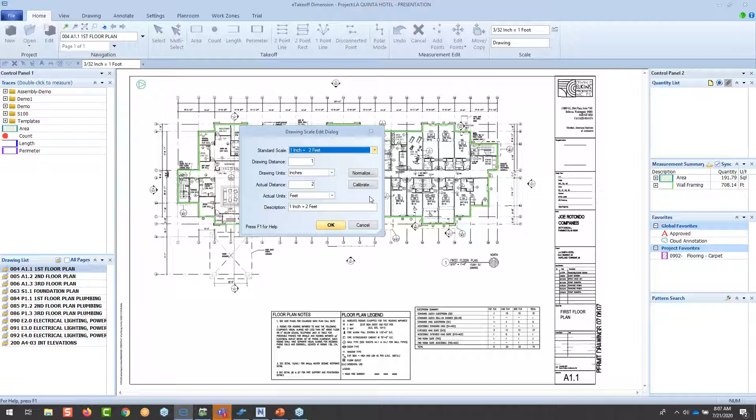So we look over here, we've got, of course, a scale. Got to know the scale. We give you the capability to do imperial, or we give you the capability to do metric. Now, here's the thing, we always want to be able to calibrate the scale. We want to make sure that the scale the architect or whoever gave us the plans is accurate, so distance between two known points, and we can calibrate that scale for you.

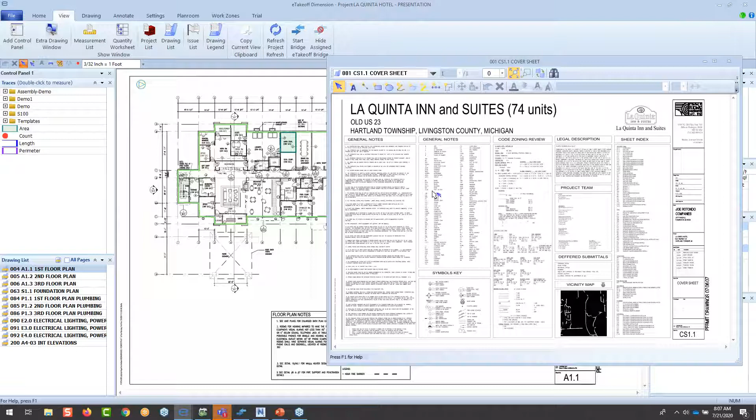As we move over here, we're going to look at view because it's important to be able to see lots of information. So what we want to do is give you the capability to see as many windows or as many pages at one time as you want. Lots of ways to navigate the system, but as you can see, here's my main screen back here. Now we can zoom in. Here's where those additional windows come into play. I can drag and drop this on my other monitor, and we're good to go.

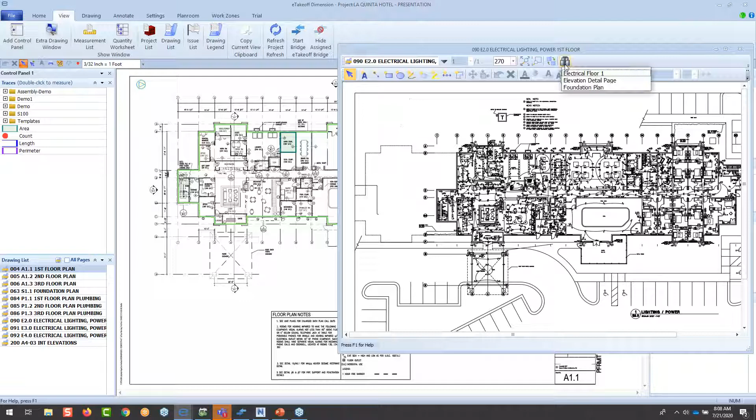We can make any notations, red lines, whatever you're looking at, and we can quickly get from one page to the next. So drop down menu here, or we can just very quickly go to those defined particular pages we set up.

Let's take it to the next step and let's get rid of that extra page. Now we're zooming in on this area right here. One of the things that this solution does that no other solution will is give you the capability to have multiple detailed scales on one page. In this case, in this border right here, it's a quarter inch equals 1 foot. Down here, 6 inches equals 1 foot. But the overall scale right here is a half inch equals a foot. You can have as many scales on one page as you want.

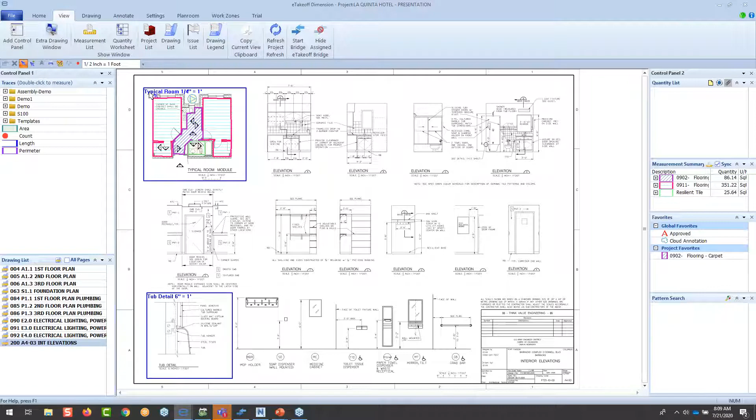Some other solutions make you copy a page, name it by another scale. Pretty soon you've got like 5 pages that represent the same page because of a lack of capability of that solution. So as we drill in here, we're going to zoom in this particular area right here, and we're going to do an overlay.

We want to be able to compare that revision to what we've already taken off. And as you can see, if we drill in even further, red is old, blue is new. We're going to take that countertop out a little bit. We're going to turn the stove top and make it work for us.

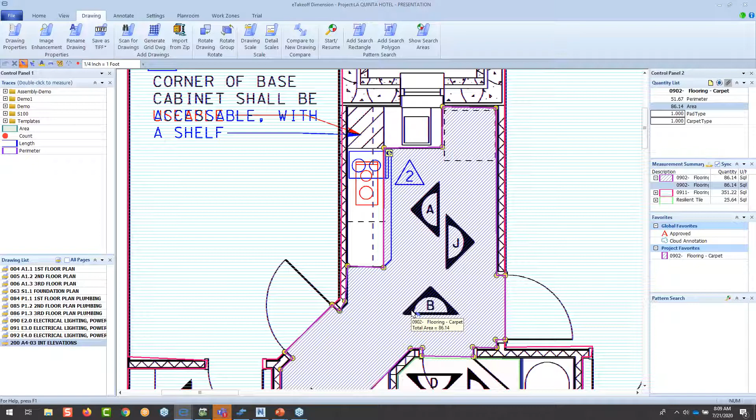Now, one thing about this takeoff here is I've already sent it to the estimate, generated an estimate from it. Well, I'm going to make some changes here. I'm going to edit this guy real quickly based upon the changes that we've seen here.

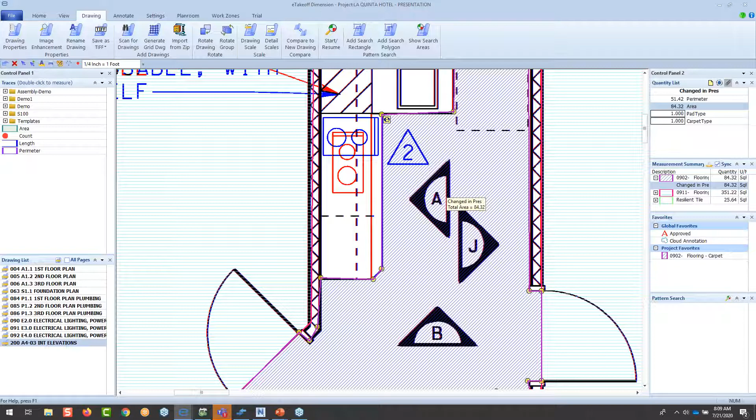And then I'll change the naming of this to 'changed in presentation,' I'll just say pres for short. I can only do 30 words per minute, that's the best I ever did in typing, so I don't want to bore you with a lot of typing as we go through the process.

So let's navigate out and start doing some takeoff. As you can see, there are a lot of ways to navigate with the system, hyperlinks and all sorts of fun things we can do here. So let's do a quick takeoff.

Let's do an area, and with generic takeoff right out of the system, we have the capability to do perimeter, length, and also area. So I have a point, length, and perimeter area count. If you're a unit price contractor, that may be all you need — just that area, then put a dollar per square foot. But we do want to give you some functionality above that.

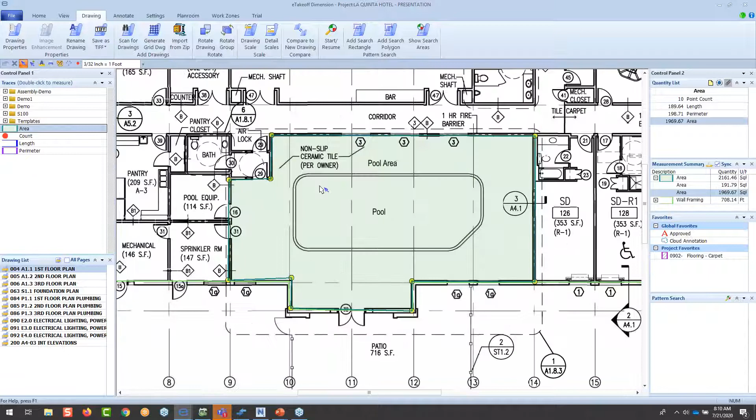So with that being said, if I drill in here and want to back this guy out — by the way, in the next iteration of this solution, we're going to have the capability to just hit this line and it will take off that entire line for us. So just so you know, that is coming in the very near future.

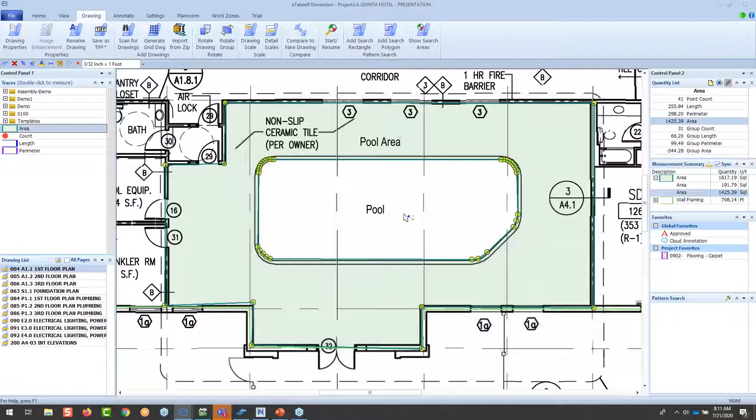So in this case, in that pool area, it might have been stamped concrete, paver stones, whatever it is for your company. But we back that pool out because we know it's going to be a different material. In this case, we want to define what that's going to be really quickly, and let's call it concrete. Boom, done — we've just taken off that area as expected, filled in completely, specific to that line.

Now you'll notice a couple things here. First of all, you've got an E. This E is a protection, a safety layer for you to make sure you do not miss anything. Matter of fact, if I go into our summary right here, I'm going to see that E. Let's say you're in review mode and you want to make sure you don't miss anything — we'll be able to see that.

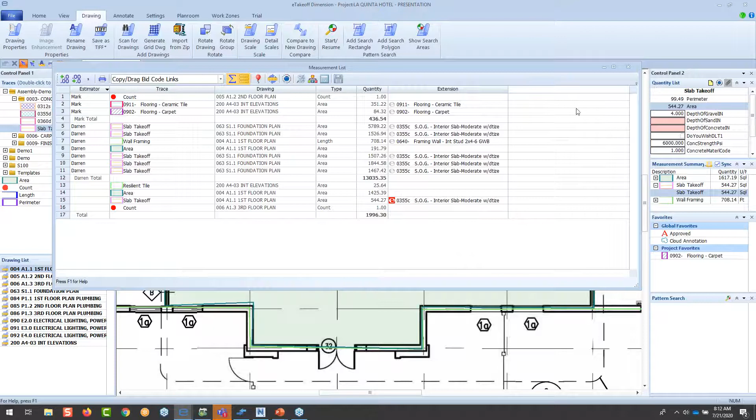By the way, I've got this sorted by the people that have been working on this particular plan, so you can see the estimators within here. A lot of flexibility we can do with the solution, but I just wanted to show you, even in review mode, we're going to give you an alert that we need to fill in more information.

So let's go ahead and do that, let's fill in some info. Now you look, and here are what we call variables. For those of you that have used our estimating or worked with our estimating, used to be Timberline — I come from back in the DOS days, believe it or not. Well, believe it, if you saw me, you would believe it, my face shows the age.

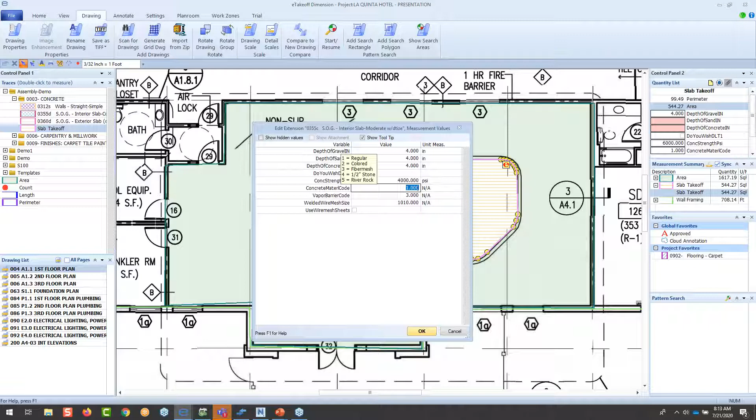But when we look at this, we've got depth of gravel, depth of sand, those variables defined by the concrete. So whatever your business does, we can define these variables specific to what that would be for you. In this case, I'm going to say 4 inches, 4 inches. What's the PSI of the concrete? We'll say 4,000 PSI. So again, whatever those questions may be for your company, we can achieve those.

I'll say okay to that, and we'll do one more to give you a little bit of a different look at what the takeoff would be. Let's do wall framing, and let's just quickly take off this wall. Same thing, same E as you'd expect, but different questions because it is a wall — it's an interior wall, so what's the stud spacing? What's the stud size? You have that capability there.

The number of corners, we'll put 3. And then if we did drywall, we could enter that information, that detail as well. So just wanted to give you a different example of what those variables are like.

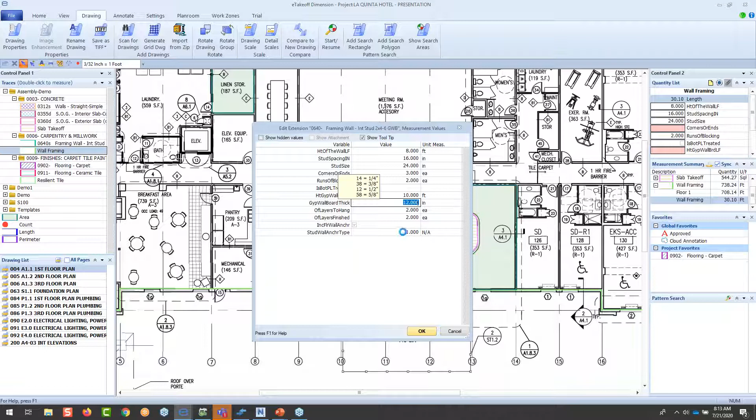Now, one thing to keep in mind is as we see this flow over into the estimating, every one of these answers will flow over. So I'm not just taking one item or one quantity, I'm taking them all. So let's look at a couple other things within the system.

Well, first of all, you may want to put some stamps out here. You want to have some automation, maybe some clouds that you want to have available to you that you use over and over again for every project that you do. Well, we've got that covered with global favorites, so we don't have to create them over and over again.

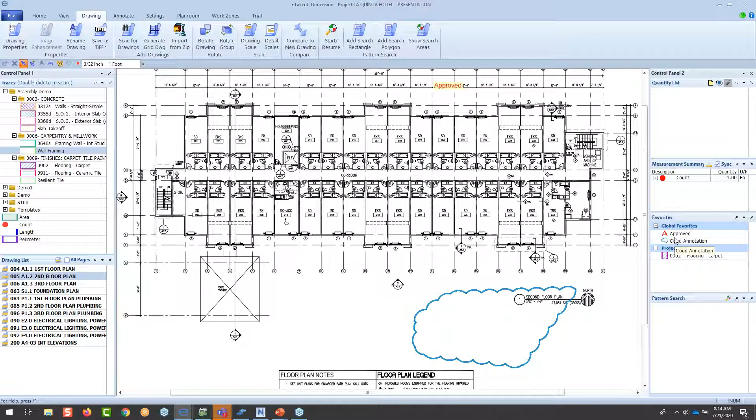They're there for us. When it comes to takeoff, maybe we've done this whole takeoff on another floor. Well, now we want to make it very easy for you to set it up as a project favorite specific to this project. I've taken off this whole floor, but in this case right here, I may need to make a change to the individual takeoffs as well, which we give you the capability to do. So for this, I'm going to name this floor in Pres or PRS, short, getting even shorter as we go.

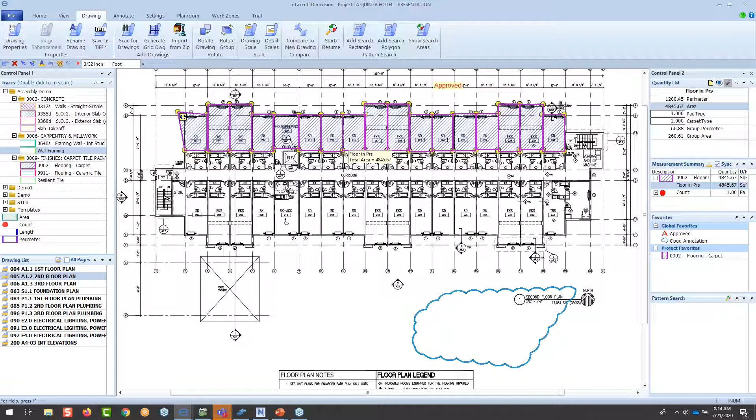Now, let's go over here and navigate to plumbing. Let's say I'm a plumber and I'm looking at the fire suppression we're going to be working on here, and we've got these sprinkler heads. Well, I don't want to go through and click, click, click. In our advanced solution, you can go through and check these particular things off manually. Or what we can do in our Premier solution is just say, hey, go find these for me. Let's have the solution do the heavy lifting for us. Makes it very easy to do.

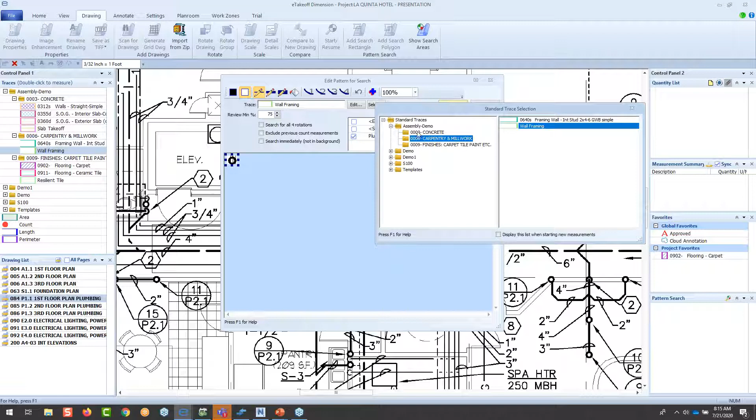So with that being said, I'll go ahead and say this is a sprinkler head, and based upon the light to dark, let's tighten this up a little bit right there, just so we get all of the ones that we want to find. Now it's going to go out based upon 75% of the ratio from dark to light. Say okay, so it's going to go search for me, and basically in seconds, we've got all of those particular heads that we're looking for.

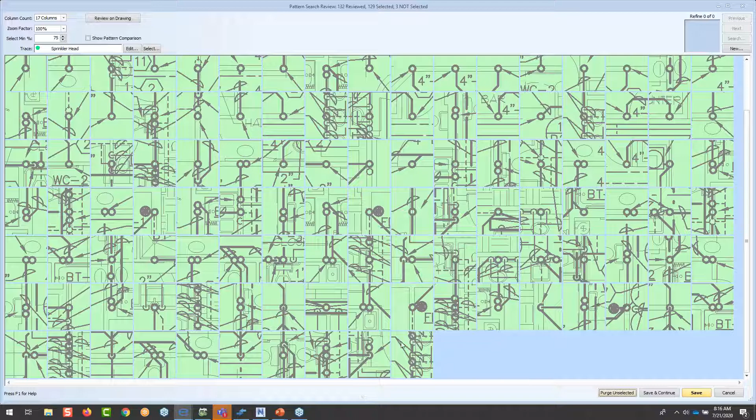So in this case right here, there may be some that we may think, oh, this isn't one, so on and so forth. Now we can purge those, Purge Unselected if we want to, just by clicking that. Or we can go through the process of looking at, you may need further review. So I'm going to go to the drawing, and now I can see those ones that need some inspection there. They're kind of darkened right there, and I'll say those are good. We may need to change that guy because he looks right to me. So giving you the capability to review it right on the page makes it very quick, makes it very easy for you to do.

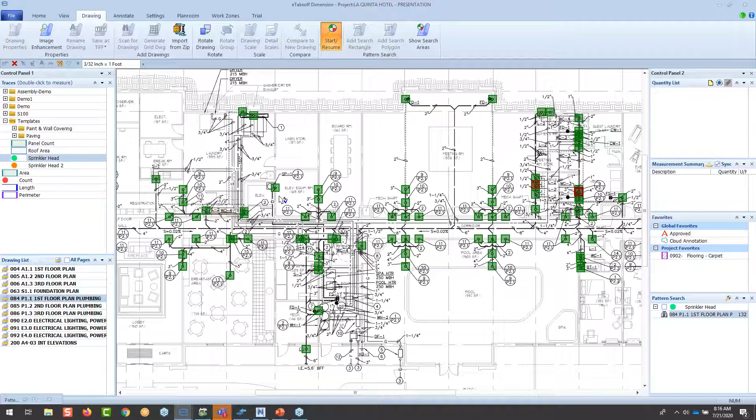So with that being said, I think we're ready to go ahead and count them. Now, with this, I've got 2 unmarked ones. So think about when you're looking at doing counting, you sometimes will come up with things that are like items. You still need to count them, but they aren't the ones you were looking for. Well, what we can do is we can save and continue, and now we've left these 2 behind, and we'll say, oh, those are the sprinkler head 2, save.

So now we've done that. We've gone through and we've counted all of those particular items right there, but we have more pages where those exist. Let's very quickly go ahead, search.

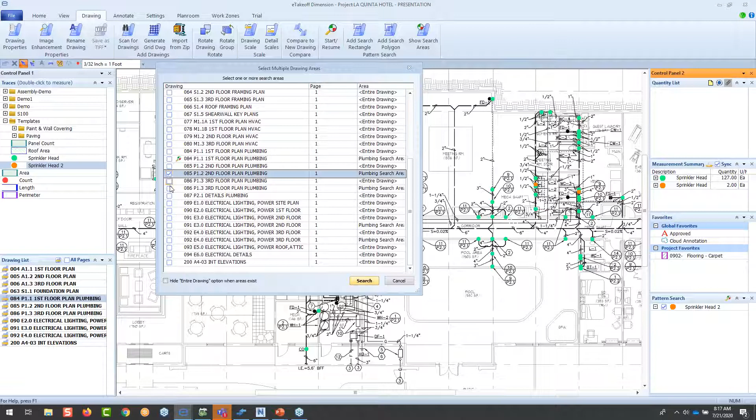And now when you're looking at this, this is based upon the size of your computer and the number of cores that you have. If you have 10 cores or 8 cores, that means you're going to be able to count 7 pages at one time, and we leave an extra core for you to do takeoff while the machine is doing the heavy lifting and doing the counting for you. So in this case right here, I select those, it goes out and searches, and it'll find all of those particular heads for me. In this case, I'm going to call these sprinkler head in pres.

So now what we want to do is we've gone through the process of doing the takeoff. Well, we want to automate the process of generating an estimate. So with that being said, now we've got all of these items that we've taken off. You can see floor 1, sprinkler head 2, sprinkler head 1. I called this sprinkler head in pres, so on and so forth.

Now, here's the thing, and this is in line with what I talked about. We have multiple people going in and doing takeoff for this particular presentation. Well, for this presentation, but that's what the product will do for you, right? So we have multiple individuals. We could just take off everything that I've done and leave what Bob's done behind if we wanted to. It's up to us. But in this case right here, we'll send everything over to the estimate.

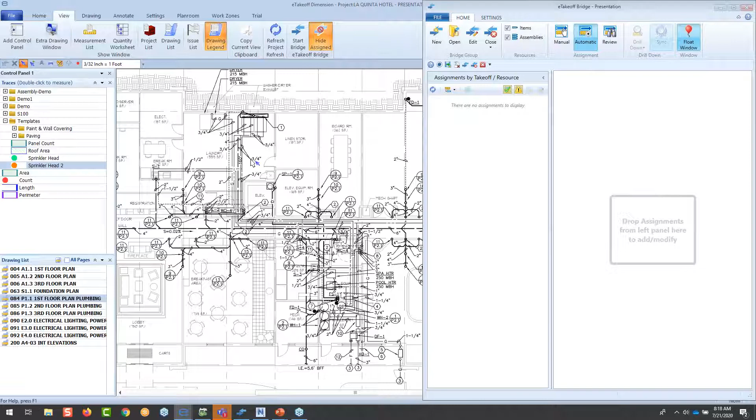By the way, anything that's been taken off, if you go over here to the product, it hides it for you, so you know that it's been taken off. If there's anything remaining there, then you know that hasn't been sent to the estimate.

Now, as we get into review mode, remember the change I made to this guy right here? The system has alerted me to the fact that that change has been made, so I can update the estimate. It went from this to this. So with the click of a button, now I can update the estimate.

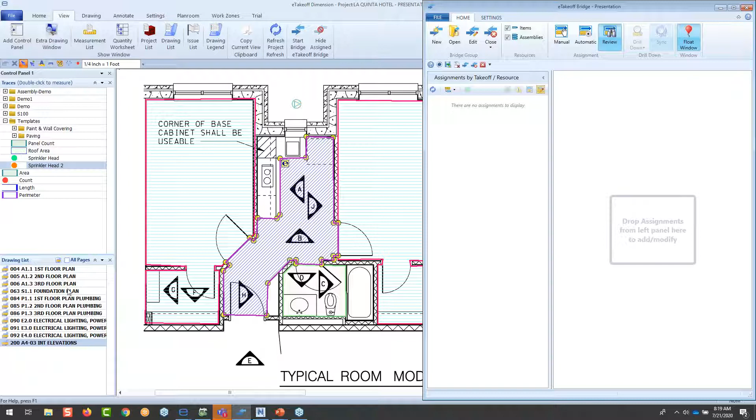One more thing, and then we'll jump into the estimate. This, I'm sure, happens to quite a few of you out there, where maybe a change of a specification happens. So we'll go over into our foundations here.

Based upon these foundations we've taken off already, we find out the PSI concrete needs to be changed. In this case, I can go through, mark them off, right click, and now you see a list of all of those variables I filled in. If you need to make a change to one of them, we could say change this from 6,000 to 3,000, whatever you want to do.

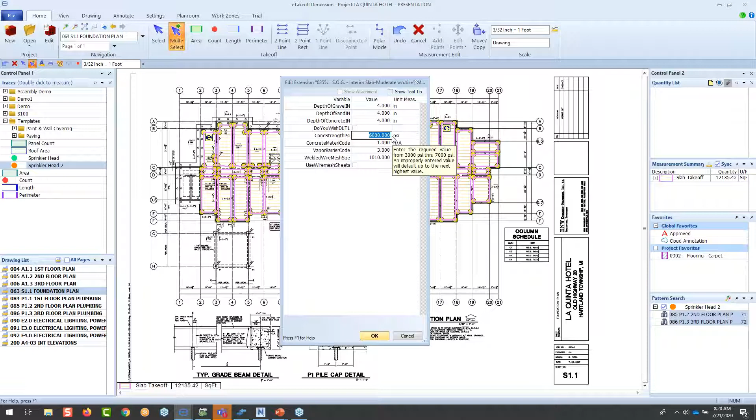But let's take it a step further. Maybe this slab, this takeoff, exists on multiple pages. So I want one central area — by the way, 3,000 to 7,000 — I want to be able to change them in one spot. Let's just say 4,000 for all of those, and let's apply that. So we're good to go.

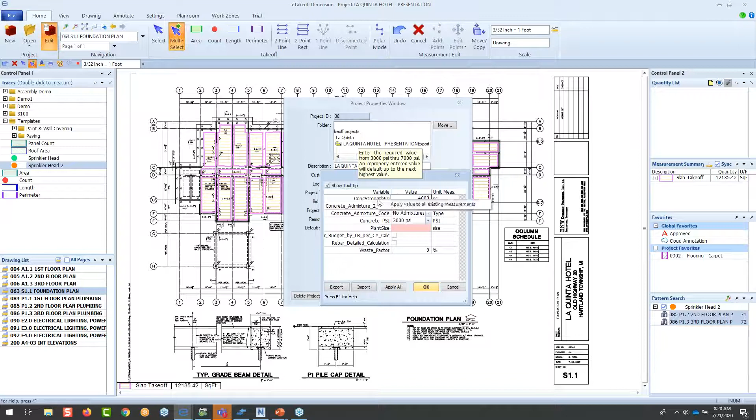Now, if you look at these guys right here, changed to 4,000. Last but not least, we go over into our bridge and say, okay, let's look at the review and update it. Now we've got all of those slabs that we've changed. We just need to update them to the estimate.

Let's go look at the estimate real quick. So now we've got my presentation estimate here.

And for those of you that work with the system, great, you know we can combine all those items, we have the capability to see all that. I've got it broken out in different looks, different feels, different colors. If you don't like colors on your spreadsheet, you don't have to have them there. One thing I will mention, for those that aren't using our system or aren't aware of the capabilities — usually most of our customers come from an Excel background, right?

So when we look at this, I just want to show you that when we type into every one of these fields, which is going to have an impact on the labor, productivity, labor cost per unit — any one of these fields here — yeah, I'll go ahead and say yes to that.

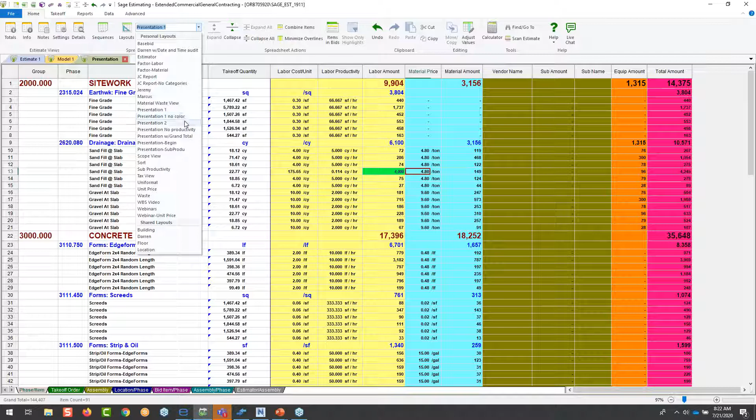Now, the other thing we like to look at here is the capability to change the look, the feel, the information that we're showing. So maybe I want to show this particular guy like this, or I want to just look at scope and detail like this — here's all my notes, those types of things. So you have the capability to look and view this information in as many ways as you want.

Now, for those of you working with our accounting system but not working with our — let me go over here and do something real quick. We'll go to productivity view, scope view here, and now we'll do that.

So when we go up here to the job cost, we're going to be able to see the information broken out in job cost format. So we can see that detail, that information, the way that you want to see it. So with that being said, we're going to have that capability.

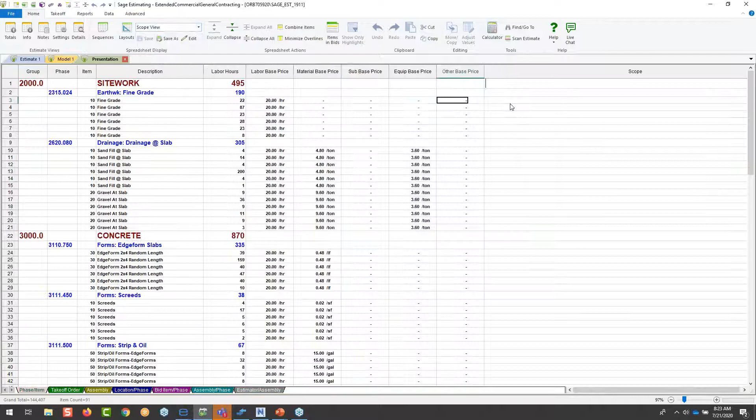I'm going to do one other thing here. I just want to get down here and scope over here, and now we'll go back over there. There we go. So with that being said, now downstream from this, your accounting system — if you want to be able to see this in a budget format, broken out in a job cost code structure — easily done.

We want to make that easy for you, just click a button, and we can update that budget in the accounting system.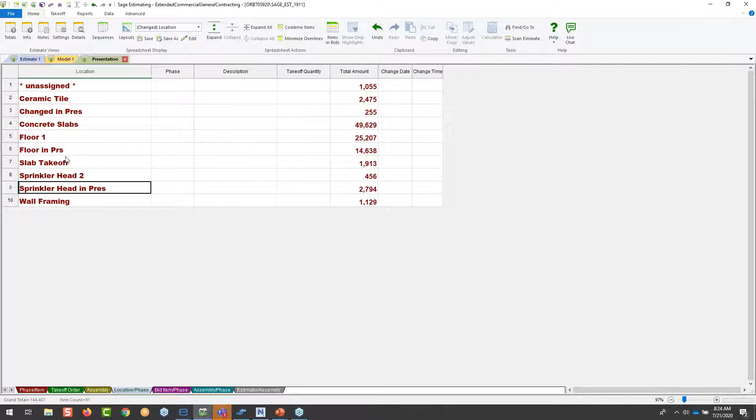Since we're in the estimating, I'll show you how an assembly can generate multiple things, because not everything is going to be takeoff from digital, right? So we need the capability to enter maybe general requirements or other details, focused on labor, those types of things. So with that being said, we can say the months we're going to be working on the job, how many we're going to need temporary heat, so on and so forth. Based upon that, we can generate that to the estimate.

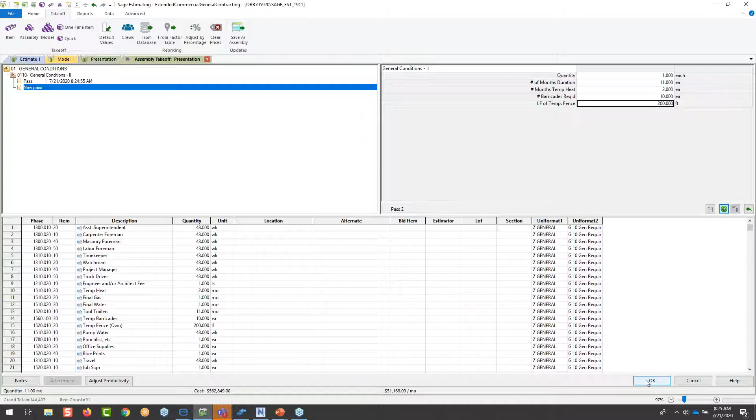Very cool. So that is an assembly that we can work with over here as well. You can do quick takeoff over here and continue to add to that estimate.

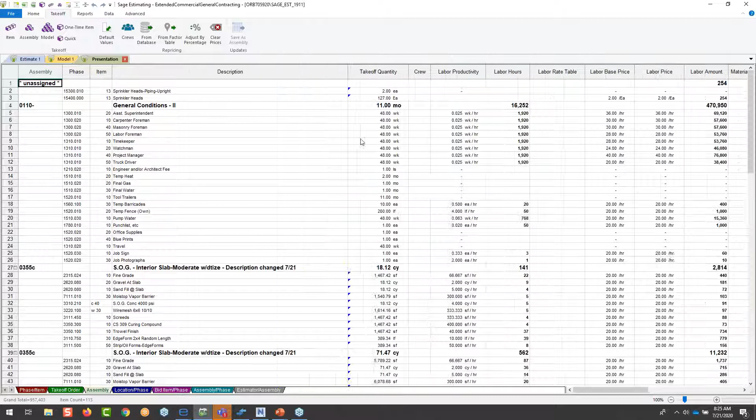Last but not least, we'll look at one other thing in here - remember when I made the change to those particular takeoffs right there? I've got that note that gives me an update. So in review mode, that's very nice. Right click, I can say review this assembly. Let's look at the view pass audit. There's the original, remember, it was 6,000. We changed to 4, all of that flowing from the digital takeoff solution.

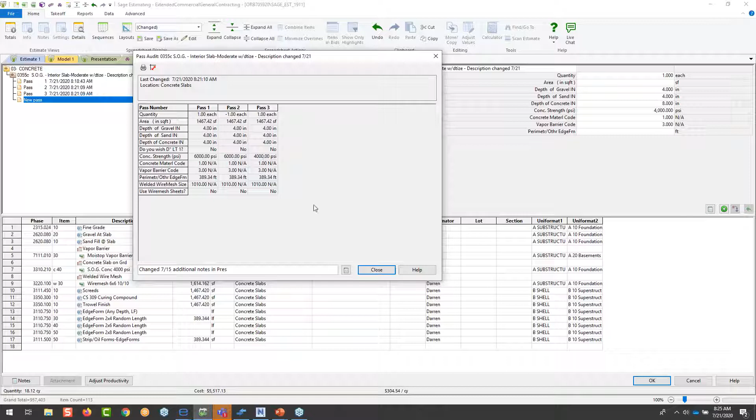Pretty powerful stuff, fully integrated, bi-directional. What I mean by that is we're going to give you the capability to move back to the digital takeoff. So you get in review mode and you're working with the chief estimator, the group of guys and gals in the estimating department, and we want to review this detail, this information.

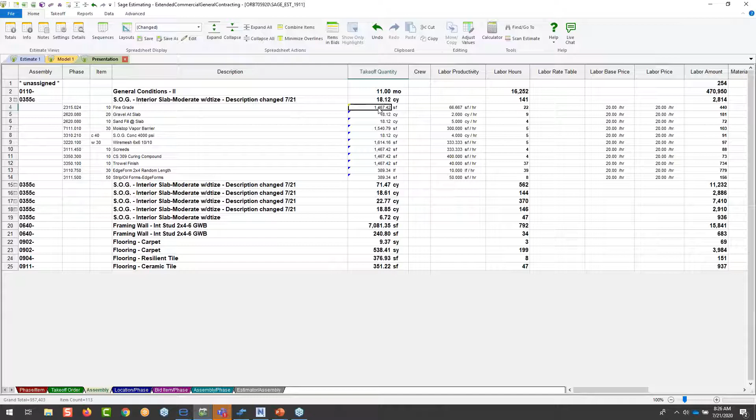You'll notice this little ticker symbol right here. What we know is that comes from outside the system. So I can very quickly right click and head back to exactly where that is on the plans, and it'll bring up the bridge for me as well. So when you're looking at full integration, some systems don't have integration between the digital takeoff and the estimating, which when you get into a review mode and you want to see that on the plans, if there isn't that connection, we have to wonder where it came from sometimes. So with that being said, we have that connection that makes it easy for you.

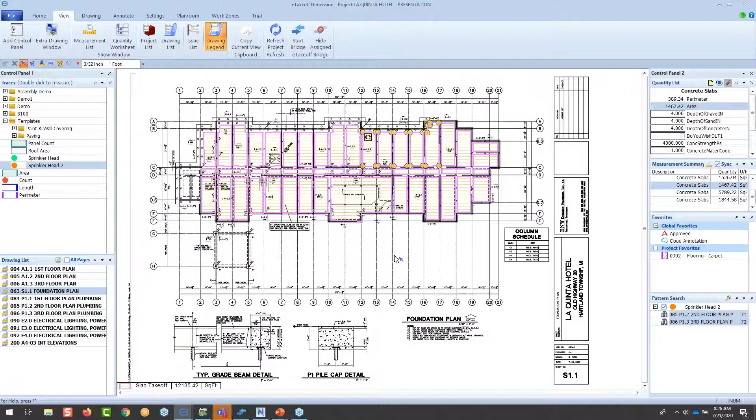Now let's take it to another level. We're going to go into takeoff here, and I'm going to go into model takeoff. Model takeoff gives you the capability of doing a conceptual parametric type of takeoff where I've got very little information.

Back in the day, it used to be something I would kind of joke with people about - here comes that bar napkin or that sketch on some ratty piece of paper, and they're looking for, hey, could you give me an estimate on that? And as more and more as I've been doing this for 20 years, I found out, oh boy, that is true. That happens more often than not. And they're always saying, hey, if you could give me an idea of what it would cost, here's the footprint, all this good stuff. I want it 5 stories high, and I won't hold you to the number. Well, you know as well as I do that they will hold us to the number.

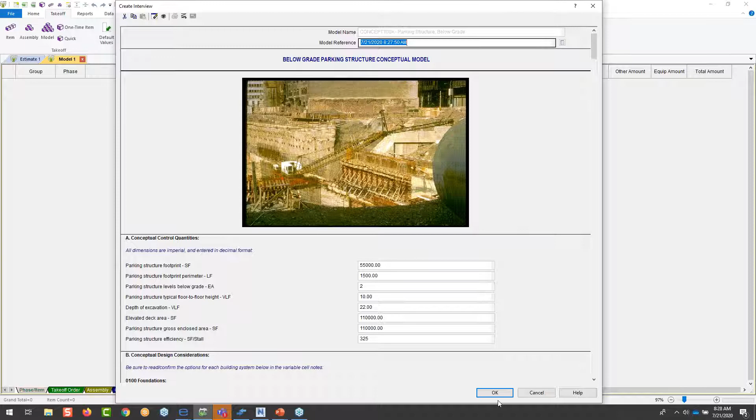So with that being said, we've got to be as accurate as possible. Models gives us the capability, based upon your assumptions and based upon your historic pricing within the system, to definitely go through and answer some questions here. I'm not going to answer any of these, but you can line up 8 to 10, 15 questions, whatever it may be. Based upon those answers that you plug in, we go back to the estimate and we can generate that. When you think about assemblies as multiple items working together, well, models is multiple assemblies and items working together to generate a complete estimate.

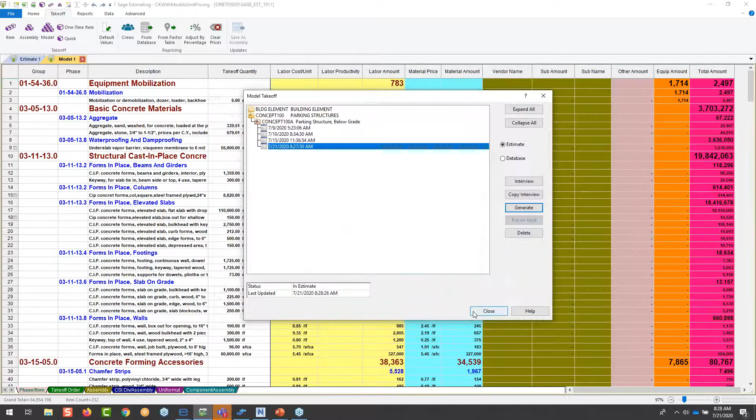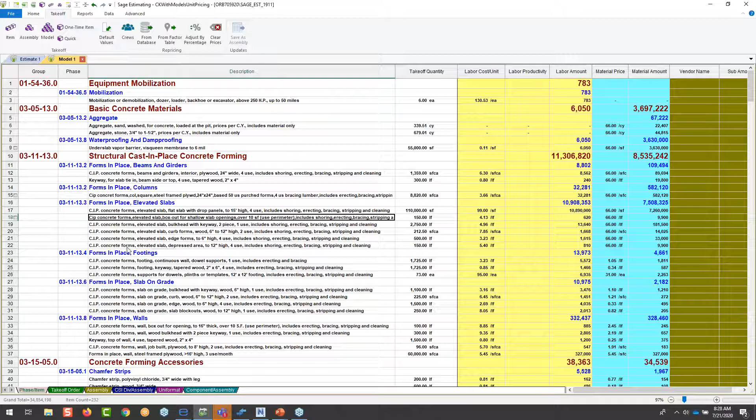For those of you working in the world of Means, Means has a different way of naming items and conventions, but that's what we're working with here. If you need to make a change because the individual wants to do this in Jasper, Alabama, with the click of a button we can change all of the pricing to what Means gives you for that location. Boom, change it right over to Jasper—over 700 cities across the US and Canada. Means does a lot of the research for you on that.

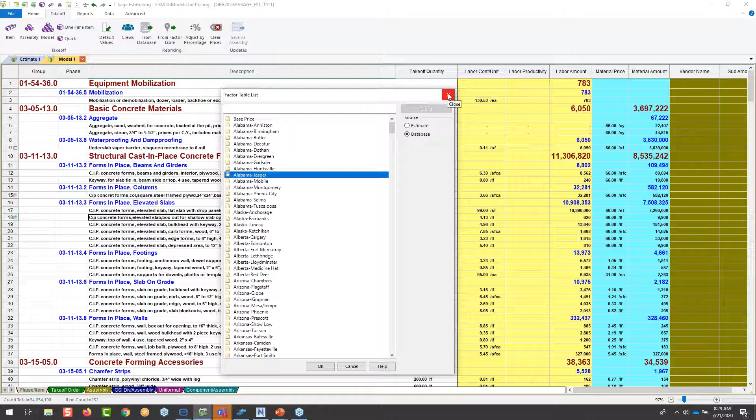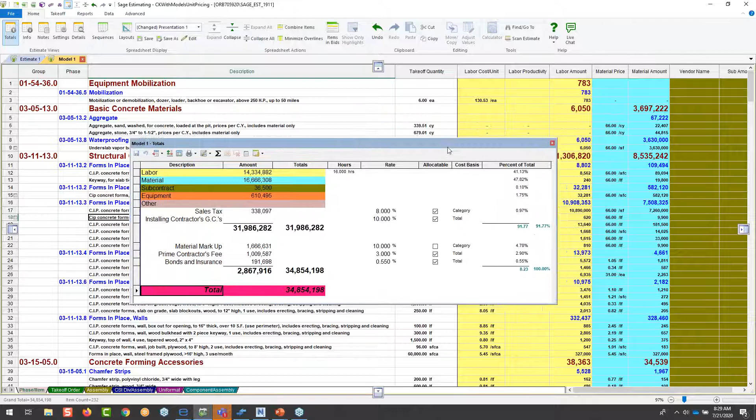The other thing we look at is the total page and breaking it down. We have the most robust solution out there when it comes to markups. We can do a markup on a markup, and allocate that detail to the estimate page as well. So if I go back in the background and see this broken down—here's the grand total amount, here's the total, here's the add-on amount, and here's the grand total. If we got rid of every one of these, boom, now you'll notice all of the markups are gone.

We want to give you the capability to feed that into the estimate. There's lots of functionality we can do here—I'm just covering some of it.

One other thing: if it's 34 million and you're in negotiation, you say if we get this down to 30 million, create a variance of about 4 million. That's ugly negotiation, taking it a little too far. But in this case, we can spread that variance wherever you want within the estimate. Pretty powerful stuff, giving you the capability to do that.

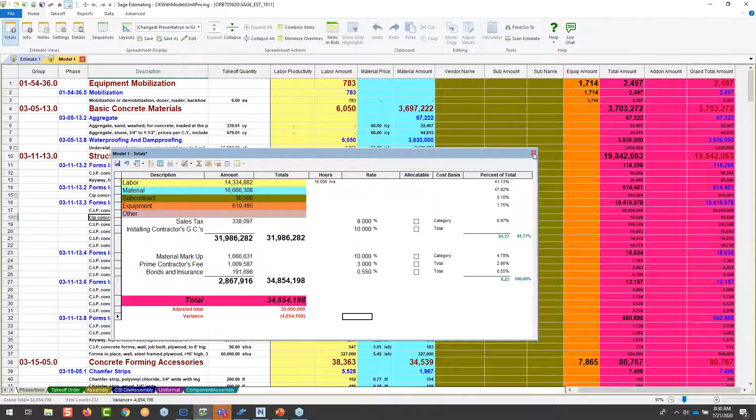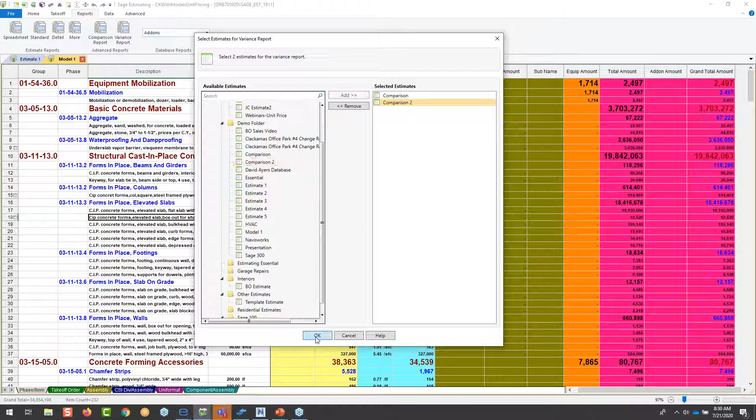Last but not least, when we get into reporting, we have one of the most robust, flexible reporting tools that come with the system. If we don't cover it for you, we've got the capability to really do any report. Maybe I want to do a variance report, comparison—I'll just generate this and preview them because we want to look at it side by side. Say you have an old estimate, the project died, and a new estimate updated with the new pricing, which we can do with the click of a button, by the way.

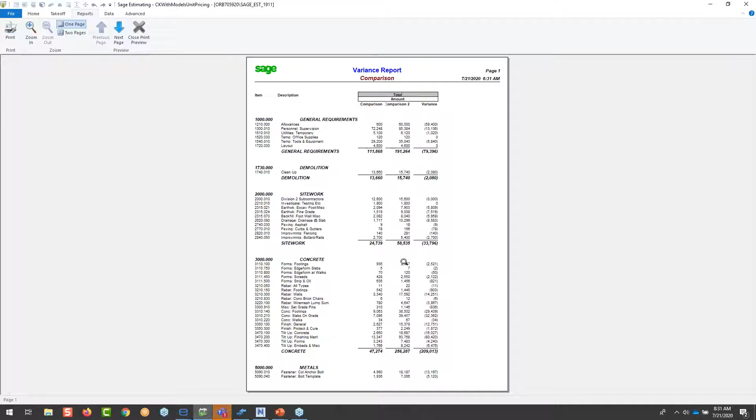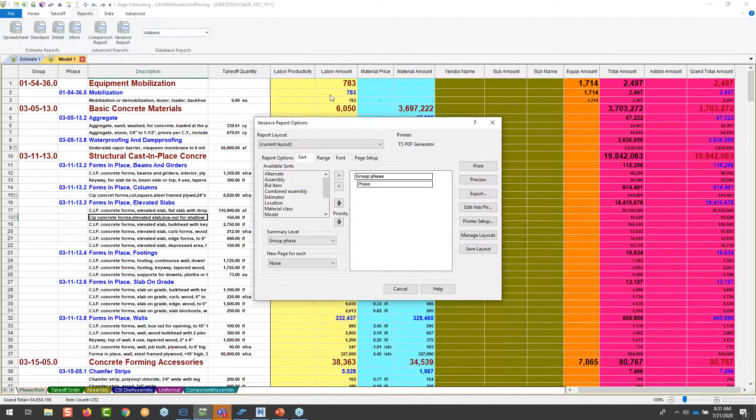Now we can compare side by side and show the customer—well, this may be a little too much detail for that customer. Let's go into report options and give it a little higher-level information. Now we can say this is where the differences are between those two estimates, the one from a year ago and the one now. Pretty powerful stuff, lots of capabilities within the reporting and the flexibility with the estimating.

One more thing: if you're buying your materials out, we can create a bill of materials, quote sheet, and so forth. And by the way, if you aren't aware, we do have a new buyout solution that just hit the streets not too long ago, giving you the capability to send out requests for quotes and do detailed comparison analysis of your subcontractors, suppliers, and vendors. So if you're interested in that, let us know—let Will know, and he can work with you on that.

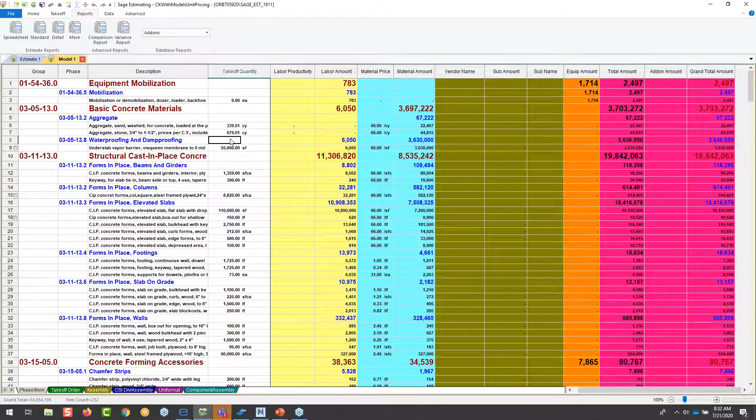Last but not least, when we get into the BIM world—I've been working with Sage for about 20 years, we used to be Timberline back in the day—this conversation used to come up more and more outside of just architects. We want to be able to do estimating based upon the objects and the attributes that make up those objects. So the creators of eTakeoff, who we're deeply partnered with, said let's make that happen. Just to define what we're looking at here, let me pull this up—you guys probably know more about the world of BIM than I do.

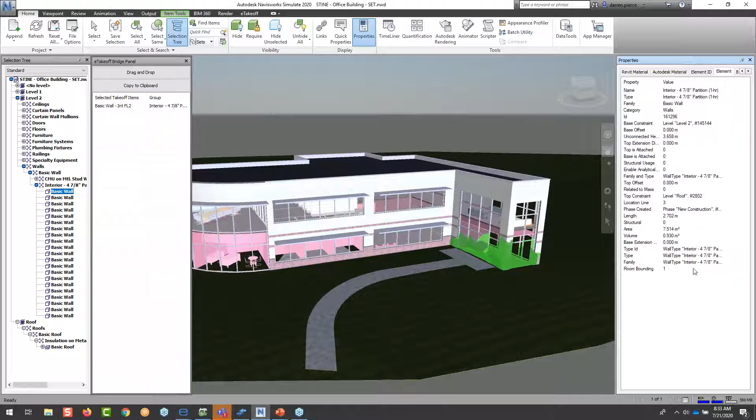When we look at this, the object is made up of all of these attributes, and these attributes are just great information for us to work off of and build estimates. So I'll get rid of that.

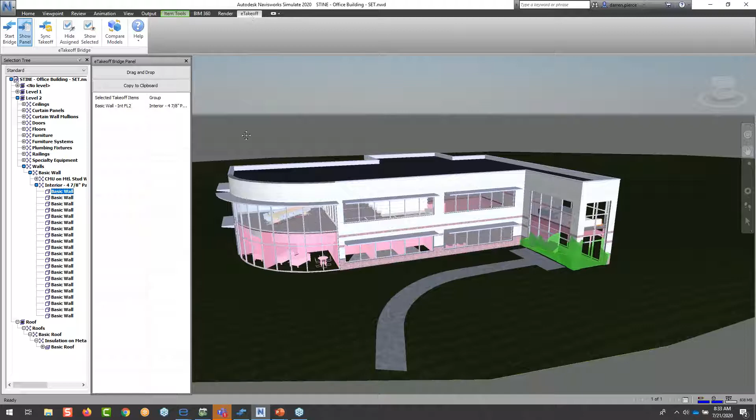Nice looking building right there. Well, if we jump over here in Navisworks, by the way, we not only integrate with Navisworks, but we integrate with Assemble, probably one of the two top tools out there. In this case, we've got the capability to bring up the bridge. Now, since we use this in 2D, now we can use it in 3D.

I'm not going to go through all of the details, but really the automation you're seeing here is it's going to go out and find all of those takeoffs. Everything that we've mapped, and mapping is really easy these days. We've got the capability to see every one of those walls.

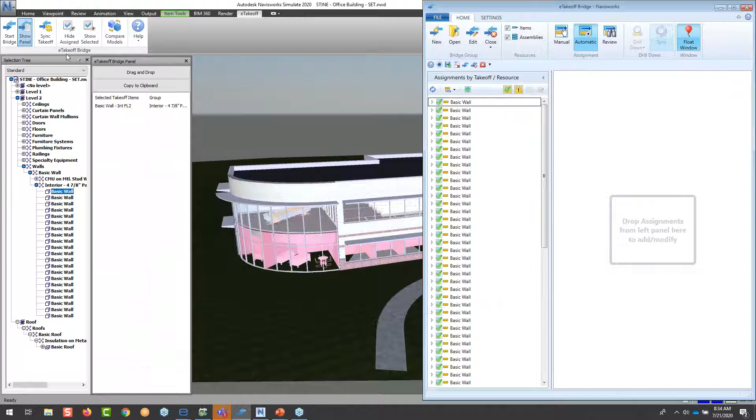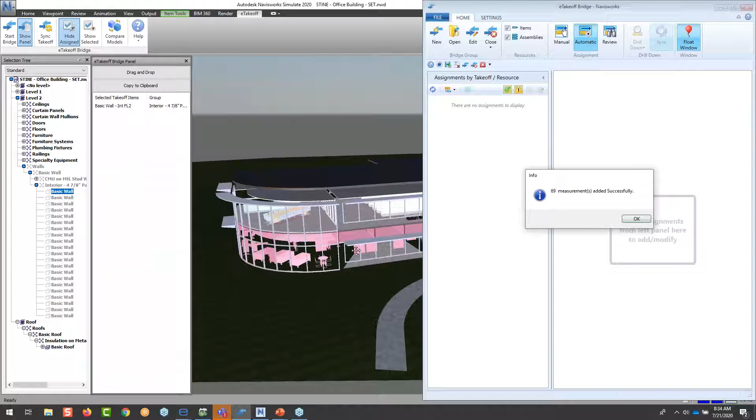Well, I'm going to go ahead and hit the hide assigned, and I'm going to generate this to an estimate. So you'll notice in the background there, things are disappearing as we go through, as you'd imagine. So if you're taking off every element, everything that's involved with this particular job or project or model, whatever it may be, we've got the capability to do that.

There you go. So when you're to the ground level, you pretty much had everything that you need to take off done. Well, it goes further than that, because when we look at the review mode, it's going to show us everything that we've taken off. Well, of course, that's the first iteration, 25% done, 50% complete, and so on. So we start looking at the progressive estimation.

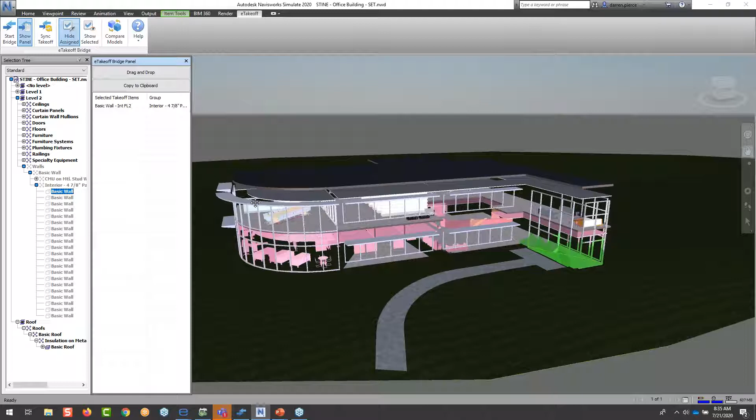Now, what we could do is create another estimate, and then compare the two side by side if we want to, using the comparison analysis I showed you. But in this case, we'll just go ahead and say compare, and we'll go find the right file right here.

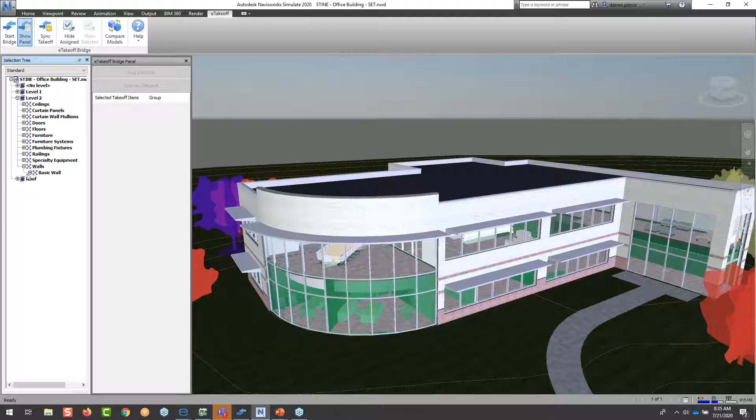Now what it's going to do is go through and compare all of those things it's already taken off with the new things in the walls right here. So if I go into hide assigned, everything that's been taken off is gone. You'll notice over here it's grayed out, but then there's some new things in here as well. Well, what it's doing is doing that comparative analysis for us.

And then when we bring up the bridge, we hit the refresh button and you're going to notice there's some different things in here. Looks like we lost a wall, made some changes to some walls, and so forth. Well, I could review those if I wanted to, but I'll just click a button.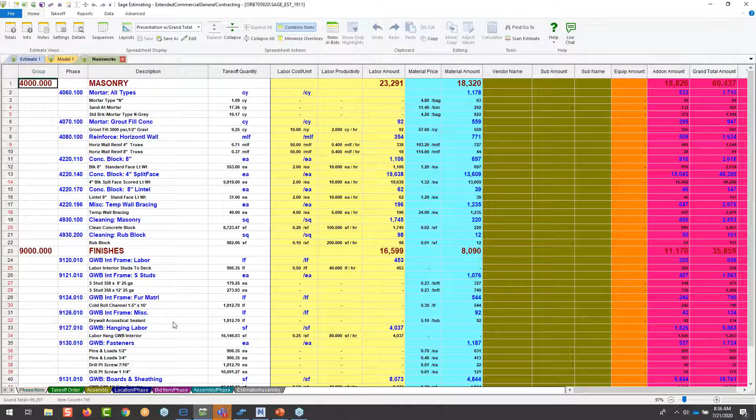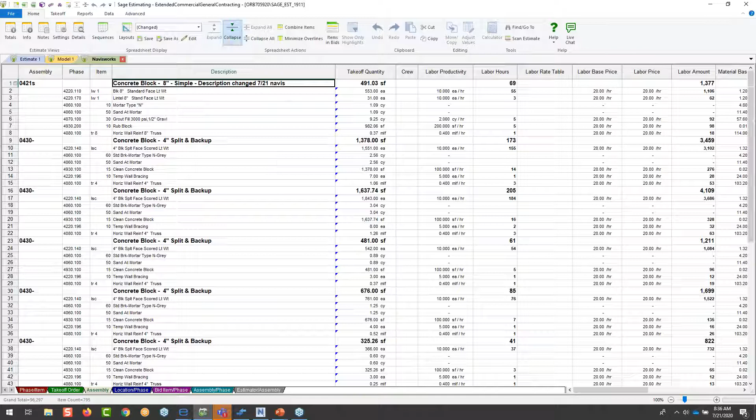If I went into my assembly mode, we could again see those changes made in Navisworks, collapse all of those, and then go through and see those in there.

The other thing is I didn't get into this, but we can actually use the location functionality as well. I didn't get into changing those. I know we're kind of running short on time. Well, we had an hour, but I hate to take up the full hour on this. But when we look at that, we have the capability to name those particular objects and have that flow downstream as a way to sort that information, that detail.

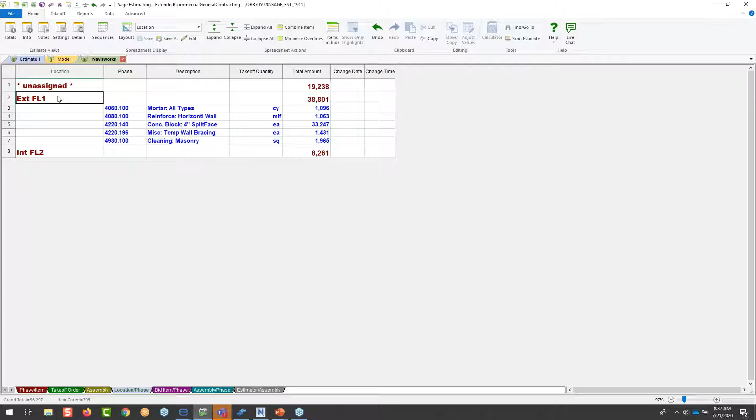So throwing a lot at you, and I wanted to just cover things at a high level. There's a lot more functionality, capabilities that we can take advantage of within the system. But with that being said, I'll go ahead and throw this back over to Will and let him finish this off. If there's any questions that we can answer for everyone, let us know.